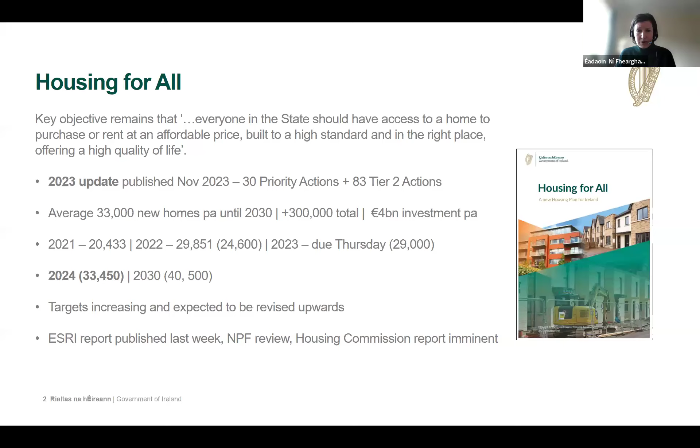So the targets are increasing, and as you'll all be aware, they're expected to be revised upwards. There have been a couple of reports, and the planning division in the department are undertaking a review of the National Planning Framework, and the Housing Commission report is expected shortly. So although we have been meeting the targets in the last couple of years, we will be challenged to continue that. So there are 4 pathways.

The 5th chapter in Housing for All is around enabling a sustainable housing system, and section 5.3 is to achieve economic sustainability. It's identified that MMC is a key measure to enable productivity and efficient delivery of housing. The original Housing for All plan identified that the Department of Enterprise, Trade and Employment, supported by ourselves, would promote a culture of innovation in residential construction and identify the development of modern methods of construction.

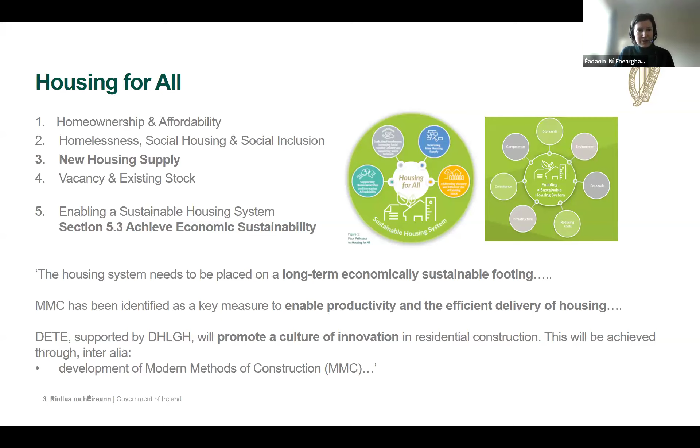So I suppose why? Well, construction costs in residential construction account for about 50% of development costs, and there have been a number of good reports from the SCSI on housing and apartment delivery in recent years. The CSO Wholesale Price Index indicates that while materials have had quite a stable year up to November last year, there was a significant increase in the previous 12 months, and the costs are still high. Labour costs are also driving costs upwards.

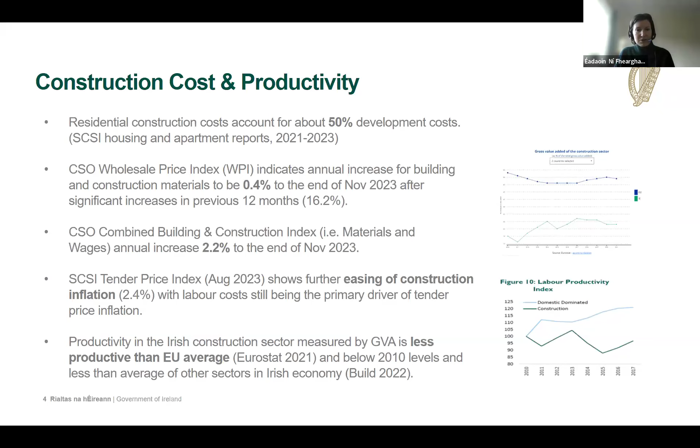The SCSI Tender Price Index, which is published about twice a year, is indicating that labour costs are still the primary driver for tender price inflation. That's for commercial construction, but would be similar, I think, for residential. Productivity in Irish construction has been reported as being low in terms of its comparison to other construction sectors in Europe, but also compared to other sectors in the economy.

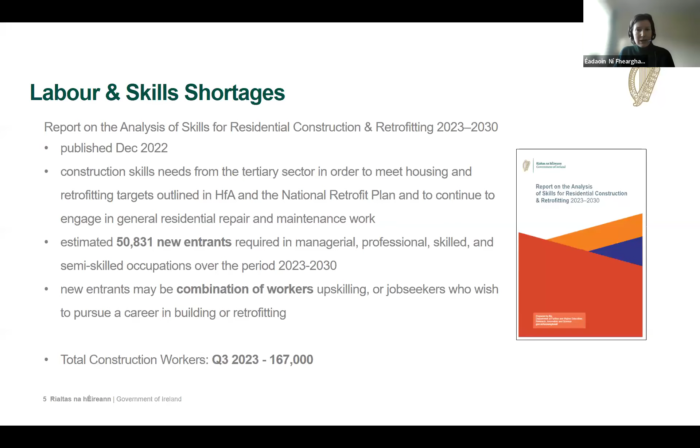So another major challenge is the labour and skills shortages. There was a report in 2022 by the Department of Further and Higher Education, Research, Innovation and Science on the construction needs for the residential sector, and it looked at retrofitting also, as well as general employment in repair and maintenance works. They estimated about 50,000 new entrants were required into craft and managerial professional occupations over the Housing for All period, and that this would be a combination of workers upskilling and also new entrants into construction.

But just to give a sense, the total construction workforce in Q3 2023, and this is not only in housing but all construction workers, was 167,000. Now that does exclude some of the professionals, but it is quite a significant challenge.

These challenges aren't unique to Ireland. We have been speaking internationally with colleagues in the UK, the US, and in Europe, and you might be aware of some of this work. There is support through the Affordable Housing Programme for MMC through Homes England, and there's also an inquiry going on which may be of interest at the moment in the House of Lords. And I've just shown the definitions framework document that CAST Consultancy led on behalf of the Department for Levelling Up, Housing and Communities in the UK, which we have - I know it's been covered in other speakers' previous talks - but the definitions framework for what we mean by MMC.

But in Europe, there was a housing ministers conference just under two years ago. The industrialization, as they wouldn't necessarily use the term modern methods of construction, but it was one of the key items. And we've also been in contact with the Housing and Urban Development Department in the US, which are developing their own roadmap for modern methods of construction there, or off-site, as they call it.

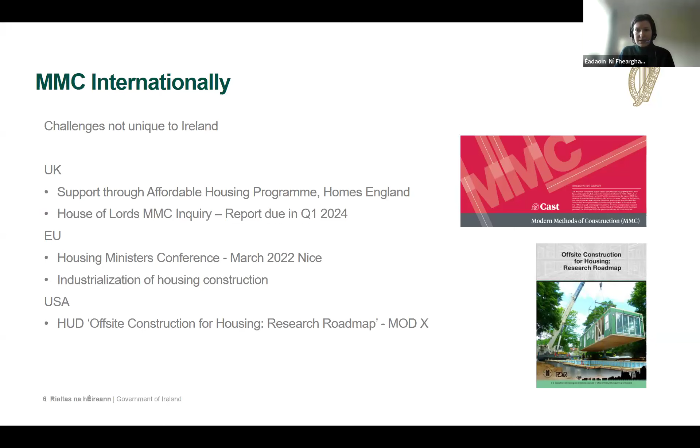So there are more opportunities than simply maybe the cost and the labour shortage. We've published a small guide which is for a general reader, but sets out some of the opportunities and describes some of the categories. These have been identified in reports, and the evidence is kind of bearing them out, and is being developed to support some of these at least.

So the faster delivery construction program and potentially the overall development program - there is perhaps longer lead times or longer design times, but we are starting to see that there may be faster delivery overall, as well as in the construction phase.

Lower construction costs in theory, based on economies of scale, repetition, standardization. We haven't seen that bear out yet, but there is some evidence coming through.

Different and lower labour requirements - that's an important aspect given the labour challenges, but it's not simply the lower labour requirement, but also in terms of the labour force, perhaps bringing new entrants if there's a different sort of working environment. If it is off-site in a factory, you potentially have a more fixed place of work, indoor working conditions. I suppose another opportunity is high quality, better quality control in a factory environment.

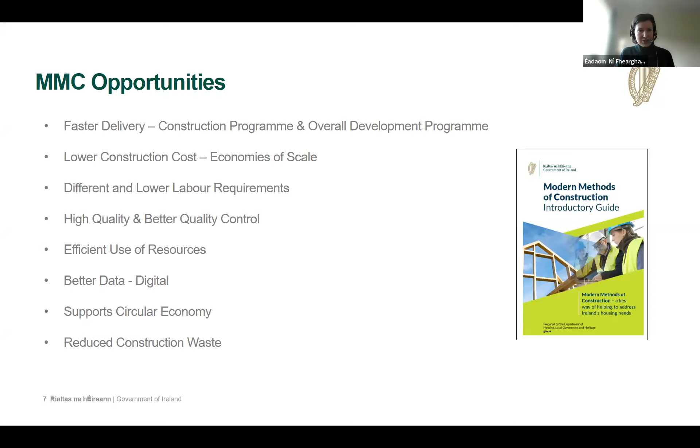And I know Martin spoke last week about Agrément, and I think there's good quality control procedures in factories, and then coordinating that with the on-site work. Efficient use of resources and tracking the use of resources, which can be done through more digitalization. You can have better data on what is going into the buildings and reduce waste and support the circular economy.

So the Housing for All plan was published in 2021. There had been work done prior to that through the CSG, and there are a number of really in-depth reports which are available - commissioned by consultants, a number by the CIF. So just to give a sense that there has been quite a lot of work happening in different government departments and agencies and through the CSG.

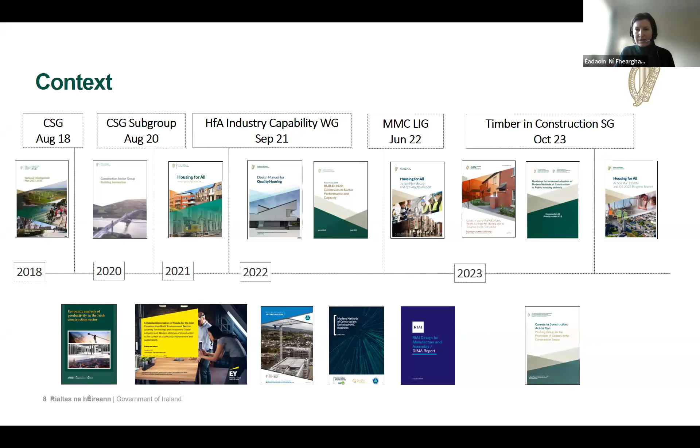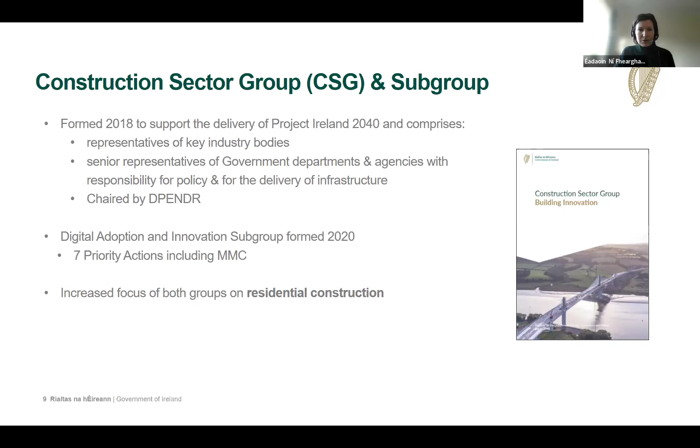The Housing for All Industry Capability Working Group oversees the work that's being delivered by the different departments on the actions related to MMC and Housing for All. And I suppose I come on to the Modern Methods Construction Leadership and Integration Group, and more recently the Timber in Construction Steering Group. So the construction sector group and subgroup have initiated many of the pieces of research and work around MMC, which were then incorporated into Housing for All, but they do have an increased focus on residential construction.

The Modern Methods Leadership and Integration Group was formed by the Department of Enterprise, Trade and Employment in response to the ask in the original Housing for All to coordinate the activities around MMC in Housing for All. And one of the significant pieces of work they coordinated with ourselves and others was the roadmap for increased adoption of MMC in public housing delivery, which was published last July.

There's 28 milestones, different themes - procurement, regulation standards, capital finance, insurance, skills development, industry competitiveness and capacity, and policy execution and communication. So in terms of the most recent update, there are a number of priority actions related to MMC and many other tier 2 actions.

But one of the pieces of work we're currently developing - I'll come on to it in a minute - is a standardized approach to the design of housing to support the use of MMC, and we look at a number of aspects of that.

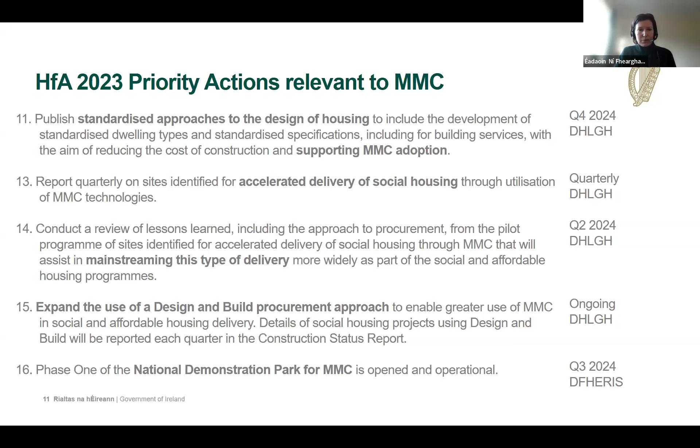There's 3 priority actions related to the accelerated delivery of social housing, a program that commenced just over a year ago, and then the National Demonstration Park for Modern Methods of Construction. I'll just mention a couple of points on this.

The standardized design approach study arose from the residential construction cost study published last May. There's an industry government steering group in place, and we're looking at existing guidance around standardization. There's a publication on a design manual for quality housing that the department published for local authority housing deliveries, social affordable housing.

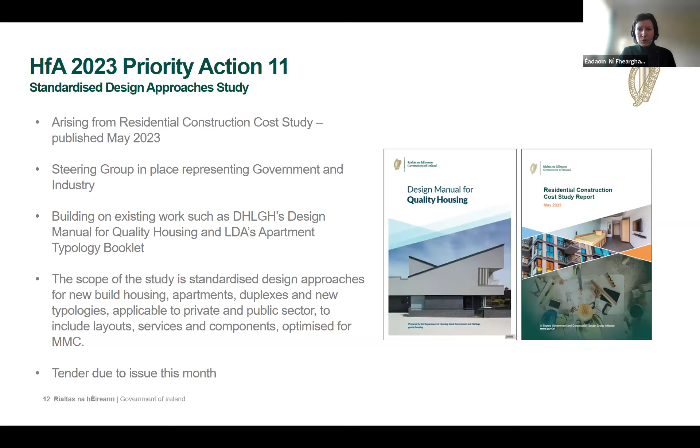The LDA has recently brought out an apartment typology booklet, but to look at house designs which would be optimized for the use of modern methods of construction, including layout, services and components, and we'll be going out with that project shortly. The Accelerated Social Housing Delivery Programme was launched in December 2022.

There were a number of exemptions and incentives to go into that programme. There are 2 working groups or management groups in place with the department, the Housing Agency, Local Government Management Agency, and the Office of Government Procurement, looking at procurement and local authority engagement.

There are 34 sites to deliver up to 1,800 dwellings in 13 local authorities currently in the programme, with 6 regional frameworks, 3 of which are currently out for tender.

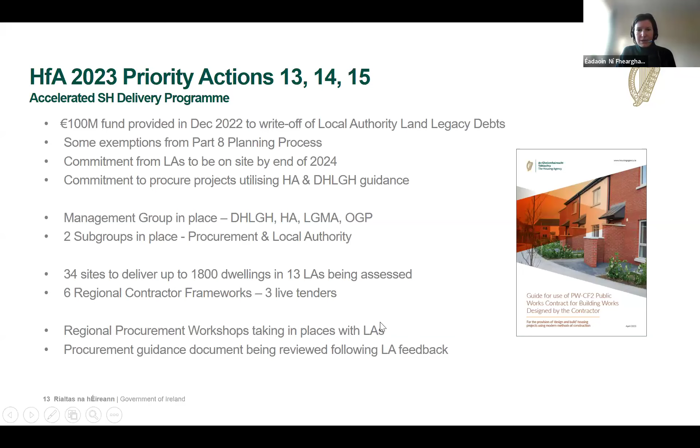There have been ongoing workshops with local authorities, regional workshops, and the procurement guidance, published by the Housing Agency last April, which is a guide for the use of the PW CF2 form of contract, which is design build or designed by the contractor, is being reviewed now to incorporate feedback.

Just as an example, in terms of going back to the opportunities of MMC, some of these are borne out in evidence. This is an example of a number of projects that were evaluated in Wicklow County Council, which has had a design and build framework for a number of years. You can see that the delivery times are substantially improved in this sample of projects.

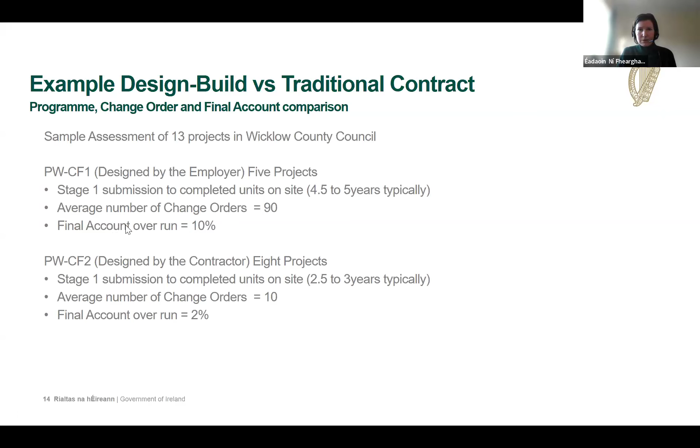The change orders are significantly reduced, which obviously has a resource and cost benefit. And then the final accounts are also coming in much closer to contract values than the traditional build.

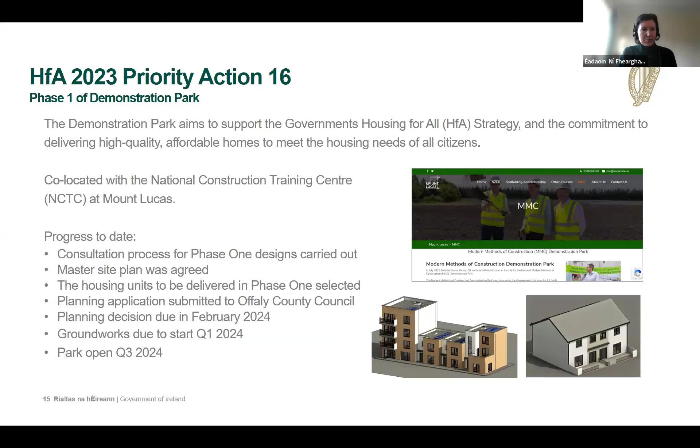The demonstration park, another priority action, is co-located in Mount Lucas in County Offaly with the National Construction Training Centre, and there's been good progress. The master plan is agreed, the housing unit designs are agreed. A planning application has gone into Offaly County Council. A decision is due in February, and groundworks to start thereafter, with the park open by Q3 as the current projection.

But there are quite a few other actions, and I won't go into all of these, but we're looking at training for public procurers, which is linked to the workshops being done for the Accelerated Social Housing Delivery Programme.

The building control authorities, we have an event in Athlone on the 31st of January, which we can share information on, but it's a CPD day on MMC. There have been a number of CPD trainings for professionals also undertaken. The RIAI had a DFMA day in November.

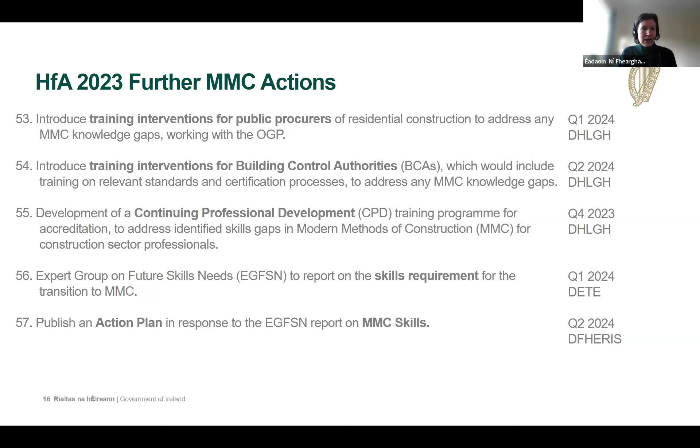There's a study ongoing around the skills requirement for MMC. There has been work done on skills for the whole of residential, but now a specific skills study on MMC, which will generate an action plan on that.

We're carrying out a study on criteria that are used to support MMC in public contracts, and we're looking internationally at what other countries have done in this space.

All of this needs to be underpinned by data. So there is a data project ongoing to have a better set of information to be able to track how the MMC sector is advancing in Ireland.

Then there are a couple of other actions around pilot projects for 3D volumetric, and also the Timber in Construction Steering Group has started its work. There was a first meeting of thematic group 2 yesterday to discuss the regulations and standards working group of the main steering group.

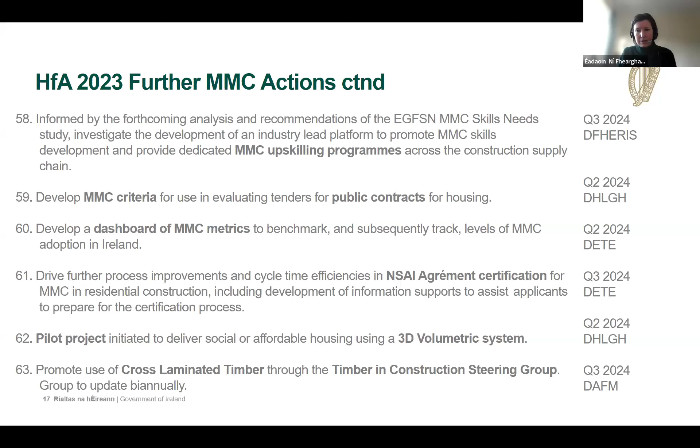So I think that's it.

Right, brilliant. Thanks, Éadaoin. That's fantastic to see all the actions for the government departments to support the MMC sector and delivering housing in Ireland, and also see the progress. One thing is having actions, but actually to go and deliver on those actions is another.

Next we have John O'Connell, who's the engineering manager for O'Connell Construction. He's on the ground actually building houses, and will let us know why developers and contractors are moving towards MMC. So over to you, John.

Hi everyone, John O'Connell is my name. I'm the engineer manager for OCC Construction. We are an innovation-driven main contractor based in the west of Ireland. We use modern methods of construction to build rapid build projects across the residential, commercial, healthcare and hospitality sectors.

So just a brief overview of what I'm going to run through today: why we use modern methods of construction, what strategies we're currently employing, the challenges and learnings we've had to date, and I'll give a brief overview of a sample case study of a housing project we built recently in Galway.

From a cost control point of view, since a lot of the detailed design is carried out before any manufacturing or works are carried out on site, you have cost certainty, which is important for a developer looking at the grand scale of things. You've decreased overheads generally, as the management required to put together all the components on site is a lot less, and the amount of time you're actually on site is typically 20% less than a standard traditional build project.

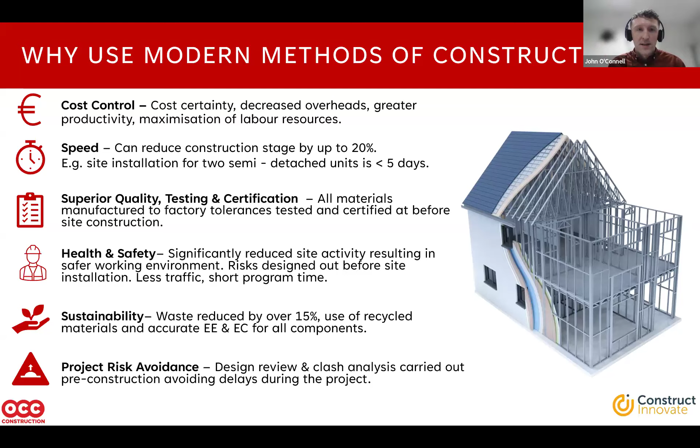So I just want to hone in on the time savings in MMC. We've been building with different aspects of MMC for the last 6 to 7 years, and we've used one prototype housing estate in particular to evaluate the use of, say, ICF, light gauge steel, and timber frame. From this experience, we're looking at where the time savings are on the program.

As you can see here at the top, we have the methods of construction for the optimized project, whether it be timber frame, light gauge steel, or precast concrete. Your detailed design and your approvals are all very important at the start of the project, similar to your traditional site build.

While you were carrying out all the site infrastructure works on site, such as foundations and getting all your site services going, the manufacture process is happening on the factory floor. This transfers to a shorter on-site assembly time, and again, you'll see the certification handover time period is a lot less due to all of the certification regarding the products within your building system already being thoroughly explored in the approval process.

So it's fairly easy to see your MMC time saving in comparison to your traditional site build project, where working with traditional building methods, you will have unexpected risks. You'll have weather conditions. A big thing at the minute is getting experienced labour and quality of labour available to carry out projects to traditional design methods. And again, the certification and handover, typically in a traditional project, is all down to the latter quarter of the project, and it creates a lot of stress for the site team.

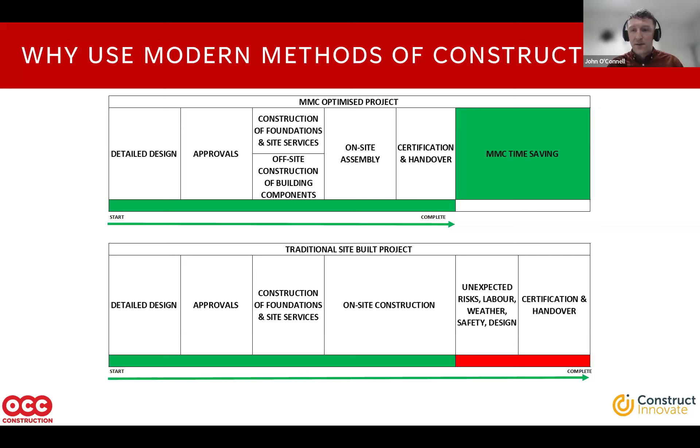So the types of MMC in use today in construction in Ireland generally - I've split this into the 7 definition categories for modern methods of construction. Firstly, the 3D primary structural systems. This would be your offsite volumetric buildings. Typically, this is largely used in schools and commercial settings where you're putting in fully volumetric finished buildings.

Category 2 is the 2D primary structural systems. This would be the offsite light gauge steel systems, timber frame systems, precast systems, and so on. Generally, across Ireland at the minute, it's light gauge steel and timber frame building systems that are used in most of the residential projects being carried out at scale.

Category 3, pre-manufactured non-systemized components. These are growing seemingly on a daily basis, where you're getting your precast piles, precast ground beams, columns, floor slabs, staircases, and individual components. There's efforts made from a lot of Irish companies at the minute to manufacture as much as possible off-site.

Regarding additive manufacturing, this would be 3D concrete printing. It's not really commonplace at the minute yet in Ireland, but there are a couple of Irish companies such as HTL that will be bringing it to market fairly soon, and we're looking forward to working with the system on site.

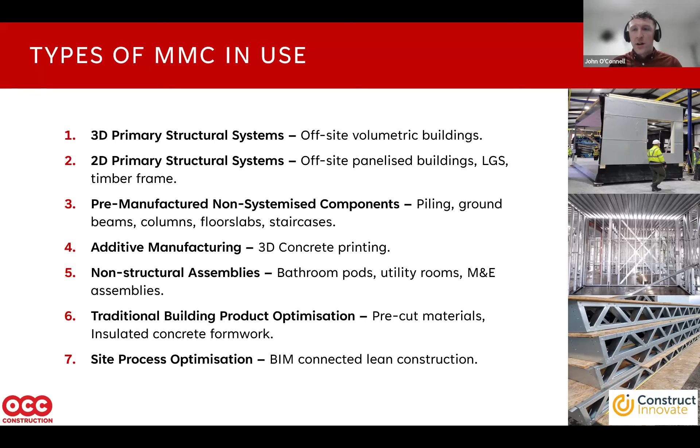And category 7 would be site process optimization. So using BIM integrated into all the design of your building project in collaboration with lean construction. We've rolled this out across all our sites at the minute, and it's presenting with the BIM clash analysis - it brings up any issues before they become reality on site. And with lean construction, it's transferring the great productivity on the factory floor to an on-site setting.

So just going to look at the current strategies employed by OCC at the minute. We've invested significantly in MMC in the past number of years, aiming to maximize capabilities of the latest technology in materials and MMC. This has led on to us forming our sister company, Greenstone Structures, a light gauge steel manufacturer also based in Galway.

As I said previously, we constructed a prototype housing estate in Kinbarra. It was the first passive housing estate in the West, but we also wanted to learn from different building types. So the first half of the estate is insulated concrete formwork, and the second half of the estate is light gauge steel framing. We also have timber frame projects currently ongoing as well. So we wanted to carry out research to see which would be the best way forward for us.

What we're finding to date is with light gauge steel, from 3 to 5 stories, that's the sweet spot where it stands on its own from a cost and productivity point of view. Similarly with timber frame, from 1 to 2 stories across the board, that's the best scenario. And with insulated concrete formwork, it compares relatively the same as timber frame from a cost and productivity point of view, but generally it comes down to the availability of resources - the shortage of skilled labour and block layers - that makes the final decision between timber frame and insulated concrete forms.

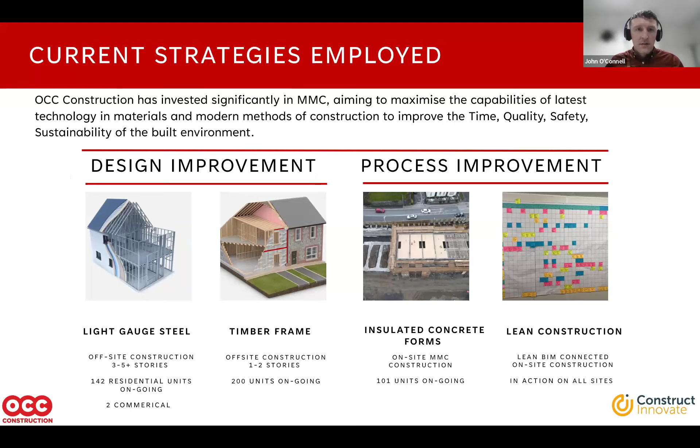From our recent projects, there are a couple of challenges and learnings as we evaluate them at the end of each. Number one is the design for manufacture and assembly philosophy. Greater collaboration between the contractor and design team at plan stage allows the most efficient design approach. The sooner the contractor and your structural system provider can liaise with the design team, the better. This narrows down the design process pre-construction and allows the greatest efficiencies to be achieved by all.

Number two would be design freeze. We found that the more time we put in pre-construction to getting all stakeholders together to review every single aspect of the building, the better. A day in pre-construction, pre-design-freeze stage is worth exponentially four times that on site for any issues. The more information we can combine into a clash analysis before construction happens on site, the better for all involved.

Regarding structural systems, I've already run through this: basically timber frame and ICF for 1 to 2 stories, and light gauge steel for above 3 stories.

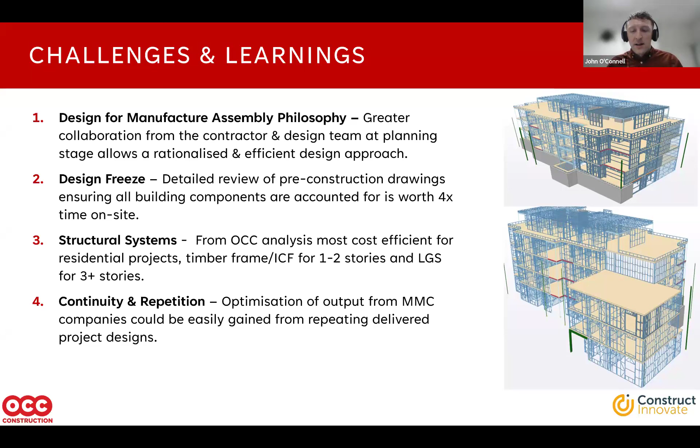We're NSAI certified. As you can see on the right, all the wall panels are complete and standing in the factory, ready to be delivered. On the left, all site services are complete, boundary walls complete, and the roof structure is erected and ready to be installed.

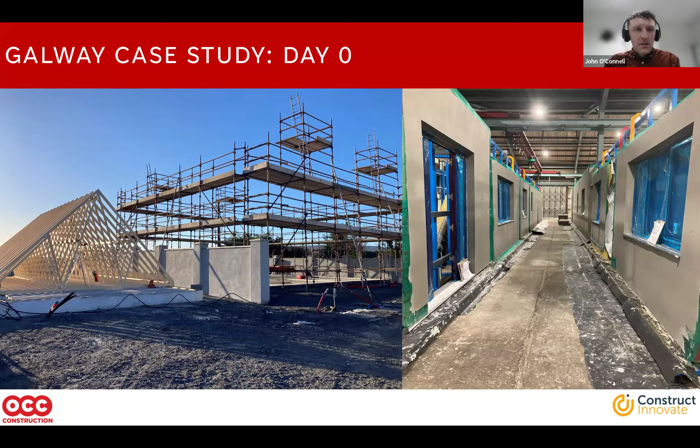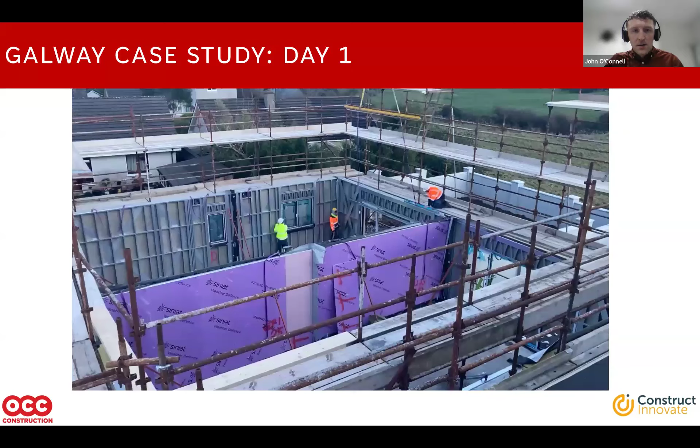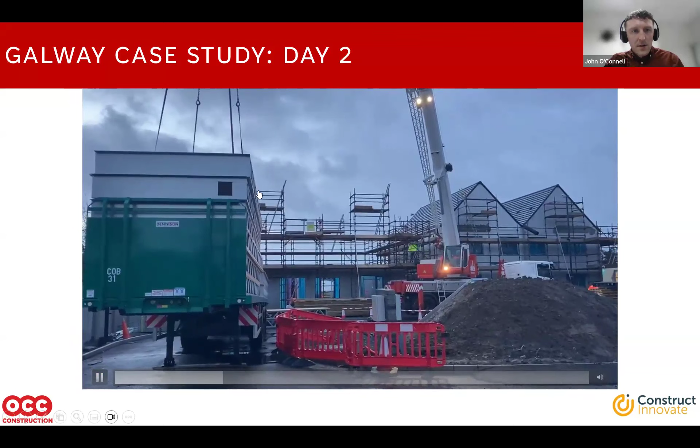Day 1 on site, all the external walls of the bottom floor are erected along with the internal walls. As you can see, there's little to no manual handling from the guys on site. Day 2, the floor cassette system is lifted into place, completely designing out the risk of installing floor joists and working at heights on site.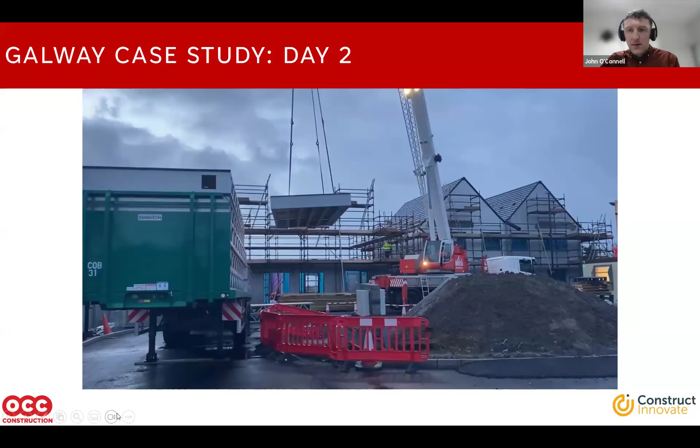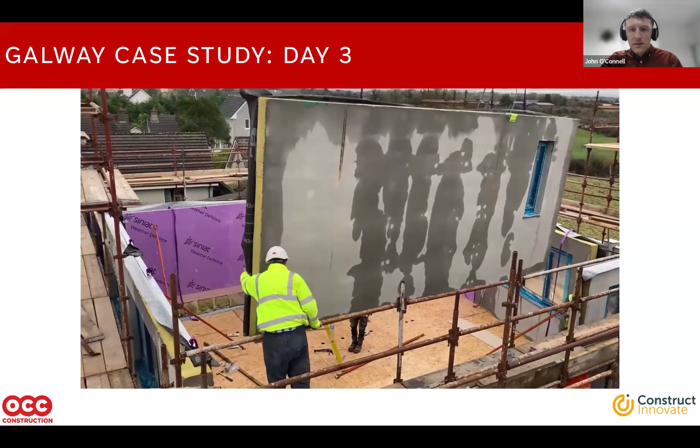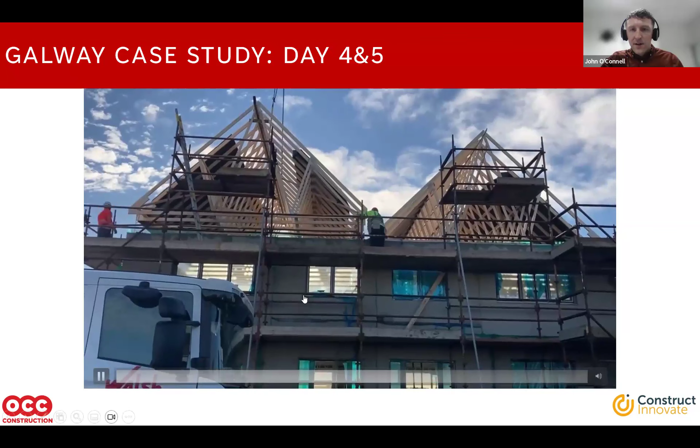Day 3, all the external and internal walls to the first floor are erected. Day 4 and 5, the truss roof is lifted into place along with the gable ends. By day 5, both blocks are weather tight.

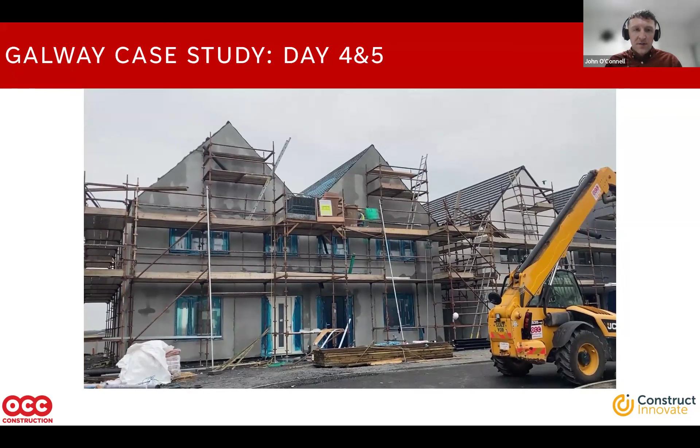Overall, we're very happy with the results of the project in Knocknacarra, and it gives us a good overview of different building systems. We found that for speed, light gauge steel provided the best outcome, though it's typically used for duplexes and apartment blocks. From a cost point of view, it is more efficient. That is all for me, thank you for listening.

Okay, hello everybody. As Jamie says, I'm Brian Broderick. I'm part of Construct Innovate, and what I'm talking about today really stems from a small research project I did with John Hickey and Trinity within Construct Innovate on design for manufacture and assembly and its relationship with MMC, and also how that connects in with design for disassembly and design for reuse.

The MMC definition framework that John went through, with examples of all those different categories, tends to focus on physical elements - the modules, the panels, the pods, and some materials and processes. But there is very little emphasis within that framework on the processes required to facilitate the inclusion of those components and building elements within building projects.

Where building elements are manufactured off-site, like the ones John showed in the video, they need to be integrated with each other and with in-situ elements on the site. That means you're going to have to use site methods - you can see the cranes, etc., in John's videos. But those site methods will vary from one project to another. Each site is different, each house is different, and the way the contractor proposes to do that will be different. So in contrast with other industries like regular product manufacturing, in construction projects looking to avail of MMC, we have a lot of project-specific challenges, which means every project, every development has to be taken on its own merits.

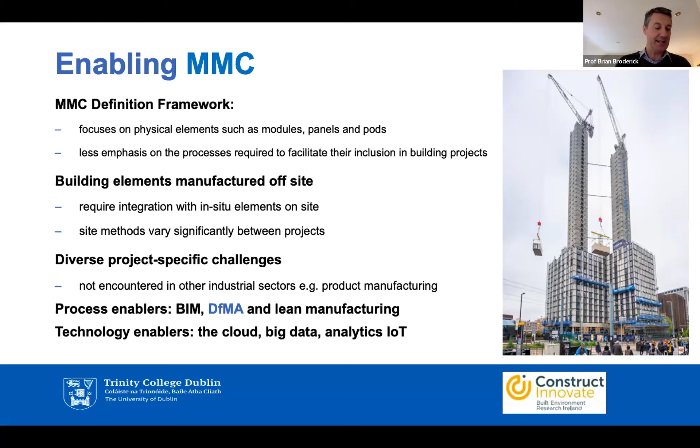So if we look at what design for manufacturing and assembly actually is, it's a concept that grew out of the manufacturing sector right back in the 1970s, and there are two parts to it: design for manufacture, DFM, and design for assembly, DFA. Design for manufacture is about the making of individual parts of a machine, or in our case a building, and design for assembly considers how those things go together. So those emerged as different concepts, and they've been put together.

In the construction sector, design for manufacturing leads to designs for buildings, housing in our case, that enable specialist subcontractors, maybe an offsite manufacturer, to manufacture significant elements of the design. Design for assembly then considers how each of those can be put together on site in a way that minimizes the amount of work to be done on site. Because it integrates so naturally with MMC, DFMA has come to be regarded as a facilitator and enabler of many MMC approaches, and there has arisen some confusion or overlap between the usage of different terms.

Sometimes people talk about DFMA when really they're talking about MMC. You saw when Aileen put up a slide referring to what's happening in the US - they don't use the word MMC, they use prefab a lot more, they use offsite a lot more. So in this talk, I'm trying to stick to the concept of design for manufacturing and assembly as a design approach, and to a certain extent a project delivery approach, rather than thinking about the physical elements that go into making up the building itself.

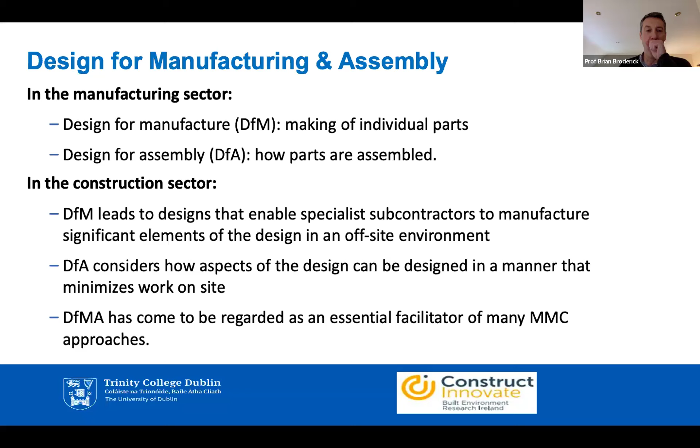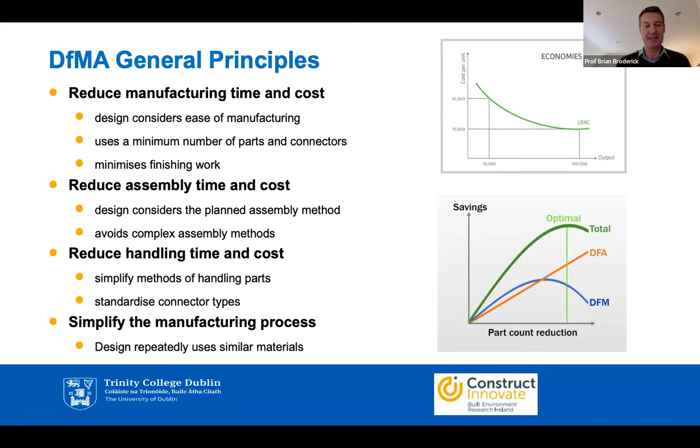That process has been really well fine-tuned within the manufacturing sector, and that's possible because generally they're working in much more controlled environments, producing the same thing over and over again, with everything taking place in one location - even something as complicated as a car, for instance, you could consider it that way. The details people go into, for instance just in terms of the handling of parts, you can look at the symmetry within a part going into a component of whatever product you're trying to produce. The greater the amount of symmetry there is, the less handling there is in the manufacturing process.

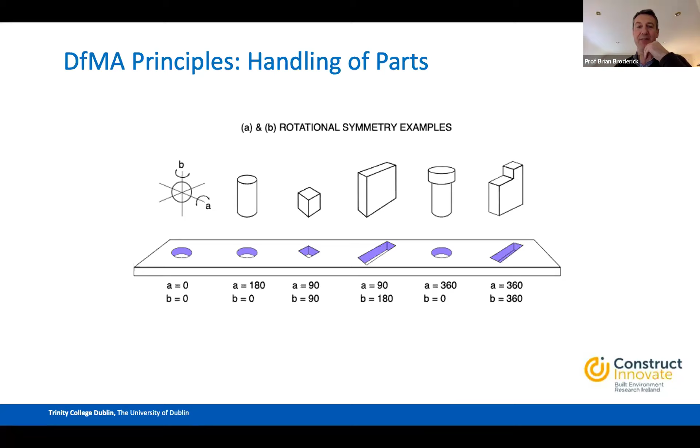Design for manufacturing and assembly is a well-developed, finely tuned activity within some manufacturing industries. Within construction, as I mentioned earlier, because each project is so different, that level of fine-tuning doesn't really apply. So the goal for DFMA is to enable increased MMC adoption in construction, and it does that by integrating together the different phases of a project: the design phase, the manufacturing phase, and the construction phase. Traditionally those might have been separate, and within DFMA we try to integrate them all together, so it is a form of integrated project delivery in that sense.

No one person is going to be able to do that. If you contrast it to DFMA in a manufacturing factory, you can imagine a designer working in that place for a number of years - they will understand the full process, everything that goes on in that factory, and have all the information together. A construction project isn't like that.

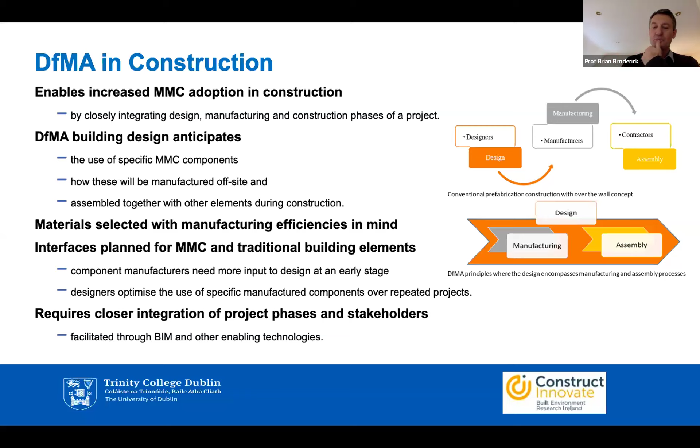So RIAI, the architects, have looked at this very carefully and produced what they call the DFMA overlay to the plan of work. The plan of work divides up the construction project into a set of different stages, and a variation on that standard set of stages has been produced by the RIAI, which allows the DFMA approach to be followed in the design, manufacturing, and construction stages of the project. The overlay allows DFMA principles and philosophy to be integrated within the familiar construction stage process that people are used to in the industry.

It doesn't mean that's the only way to do it, but it fits in with established practice. Other approaches are available, especially when we have vertical integration in the project - where one company is responsible for all of the stages rather than just one, so they don't necessarily need to partner up in the same way. As well as identifying those stages, the plan of work also gives guidance on design development in the early stages, and on sustainability and digital delivery throughout the whole process.

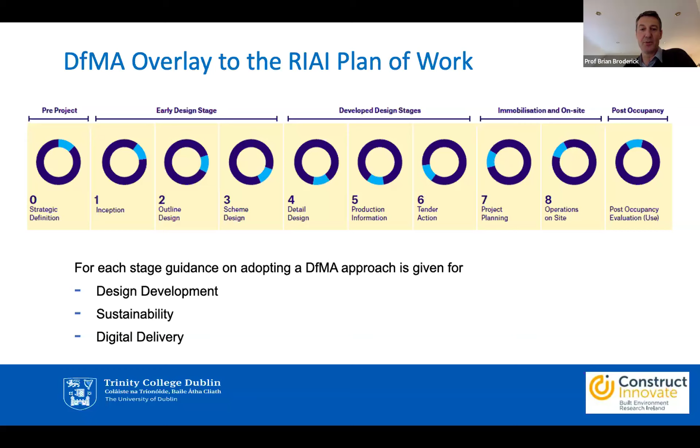Even with that standard process agreed and set out, there are a lot of challenges to DFMA in construction, and we can think about this within the research project I mentioned. We looked and saw these challenges have been categorized previously under a number of different headings - these are the headings we settled on within the project: one relates to organizational structure, the second to the contractual framework, and the third to operational systems and processes.

Organizational structure talks about the structure of the team formed by the project stakeholders - the developer, the designer, the contractor, everyone involved in the project, the client at the end, probably the household owner too. But really in the project it's the team that they form and the timing of their collaborative engagement that matters - who needs to be involved, where and when.

The contractual framework talks about how we align stakeholder goals with the overall project objective. Different stakeholders have different goals they want to achieve, but they all have to be aligned coherently to make sure the whole project is completed properly. That's where compensation structures come in, but also risk allocation. And the allocation of risk in design for manufacture and assembly needs to be different to traditional projects, needing greater sharing of risk.

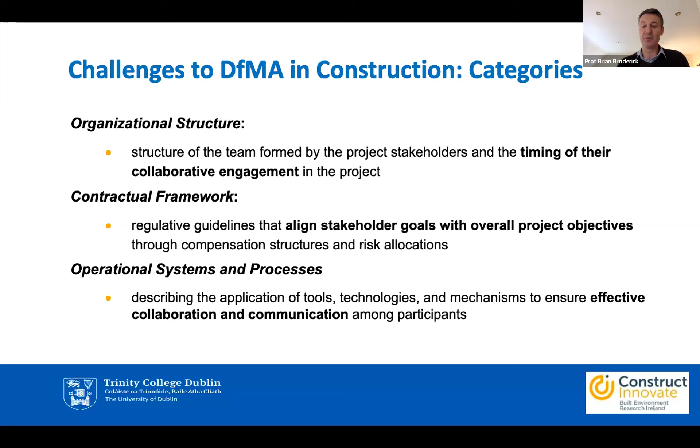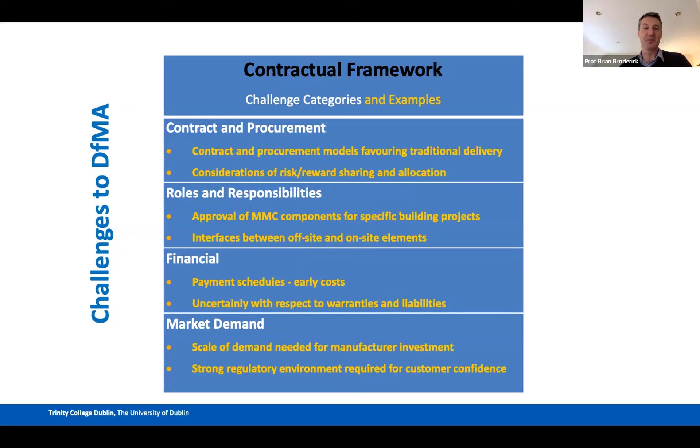Within the project, by looking at what other people had published, by looking at interviews carried out with people working in the industry, and looking at publications from some of the high-level groups that Aideen referred to in her presentation, we were able to identify a long list of challenges to DFMA under each of those headings. I won't spend too much time going through each of those, but there's a report out soon that you'll be able to read.

For design for disassembly, we also looked at this within the project. There's kind of an alphabet soup of DFs that has emerged: design for manufacturing and assembly, which I've been talking about; design for disassembly, which happens at the end of life of the building; and associated with that—what we looked at more closely—is design for reuse. Once you disassemble a building, what are you going to do with the different parts you have?

You could relocate the whole building to a new location—that happens sometimes with temporary structures. You can reuse the components as they are. You could reprocess the materials the components are made of into different components, or you can recycle the materials back into their original state and turn them into something completely different, not even a building.

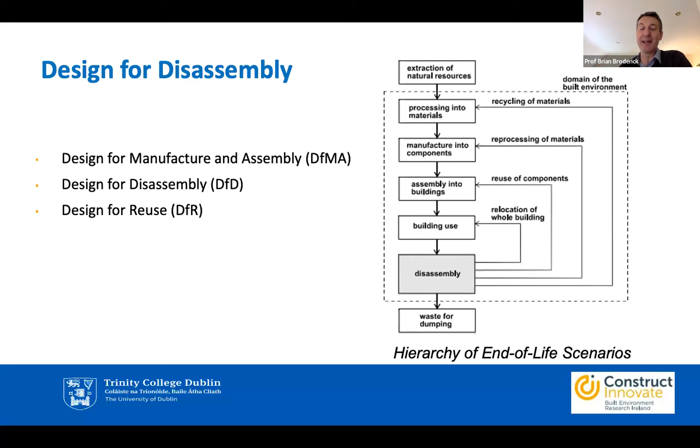Disassembly is the essential first stage for all of those reuse, processing, and recycling activities. It stands to reason that if we are planning for design for manufacture and assembly, it should also be possible to include an element of planning for the disassembly stage later in the life of the structure.

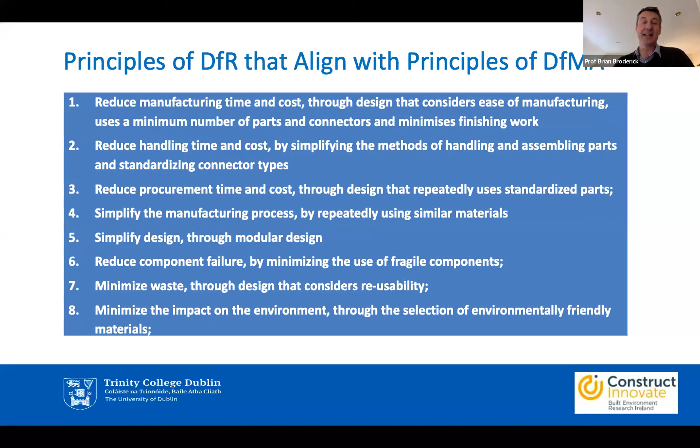When you look closely at the principles for design for manufacturing and assembly that I showed earlier, and the type of principles for design for reuse that we look at in our report, you can see there is quite a lot of overlap. Simply the modular nature often associated with design for manufacturing and assembly would seem, on the face of it, to lend itself really well to disassembly later in life—and that's true.

So design for manufacturing and assembly, which can facilitate MMC adoption and especially modular structures, can in time facilitate design for disassembly and ultimately design for reuse.

But there are some really important design for disassembly and design for reuse principles that are not part of design for manufacturing and assembly. One is the layering of building components, so that the building is constructed with a series of layers that allows you to take away the layers one at a time at different times if necessary. That's not part of design for manufacturing and assembly at all.

Compared to the really rapid expansion that's taken place in recent years in MMC-related activity in Ireland, both on the ground, as John showed, and in the policy arena, as Aideen was talking about—compared to that, in the sense of MMC, there really is very little happening in the country related to design for disassembly and design for reuse.

We need a program for research and knowledge transfer to get up to speed on this for the industry, because there are sustainability obligations coming down the track quickly regarding the life cycle assessment of buildings. We really do need to improve our level of knowledge throughout the whole industry on how design for disassembly and design for reuse can help us with that.

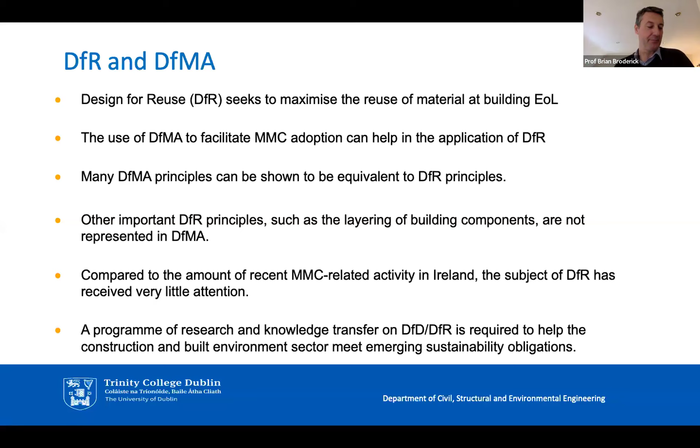Okay, I think I've probably gone as far as I could possibly go. We're right up against the time, so sorry about that, but I'll leave it there.